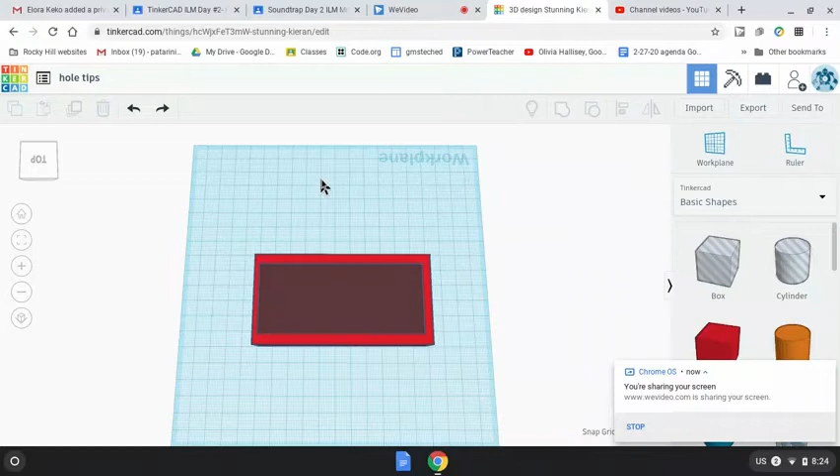A while ago, I helped somebody with getting a hole into their box.

I'm going to rewind a little bit because somebody was asking questions about the aligning tool. Let me zoom in a little bit. I guess I'm moving the box and not the hole here.

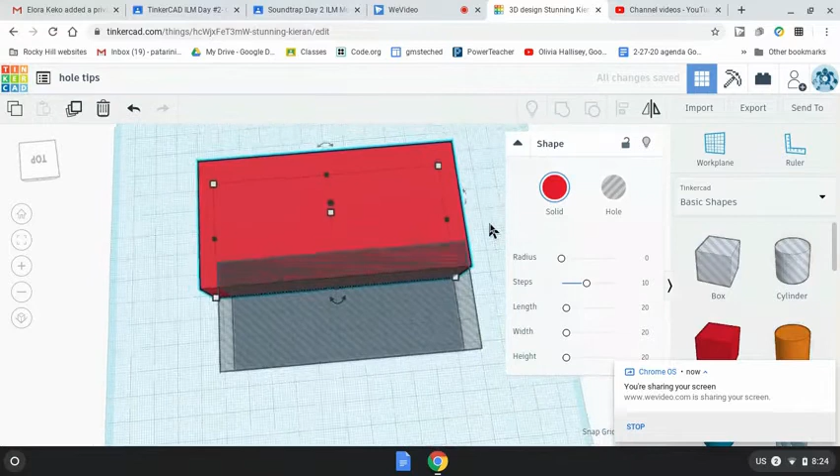But if I get over this guy and back out a little bit, I want both of these objects to be lined up. I want this hole to be perfectly centered inside this box. So here's what I'm going to do.

I'm going to make a square around both of them. I did that by clicking with my cursor here, holding my left mouse button down, and dragging it all the way. You can see there's these little squares, what we call handles, around both pieces. Both pieces have to be selected if you're going to align something, which means line it up and make it even on all sides.

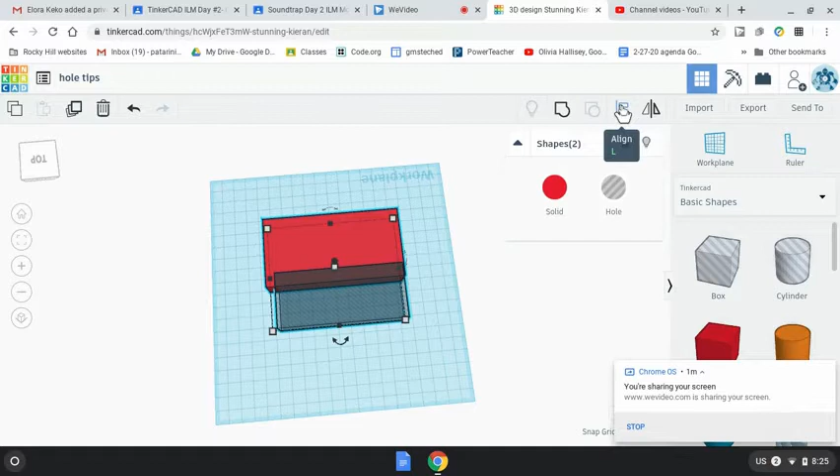You have to have two things selected. So this is our align tool. If you hover over it, it says so. And it gives you these little things, almost look like a lollipop, sticking out of the end of it here.

That one centered it here. This one centered it here. And if you look, that's pretty even around all the edges. Okay.

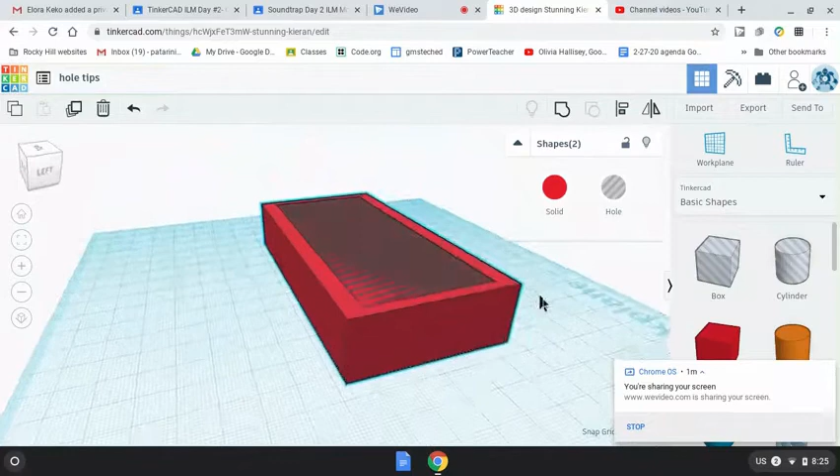So when you've got that align tool, clicking on these little lollipops, different ones will get you different actions, but clicking the one in the middle on this side and the one in the middle on this side should give you exactly what you need. Okay, so hopefully that's not too confusing. Aligning is a really useful tool.

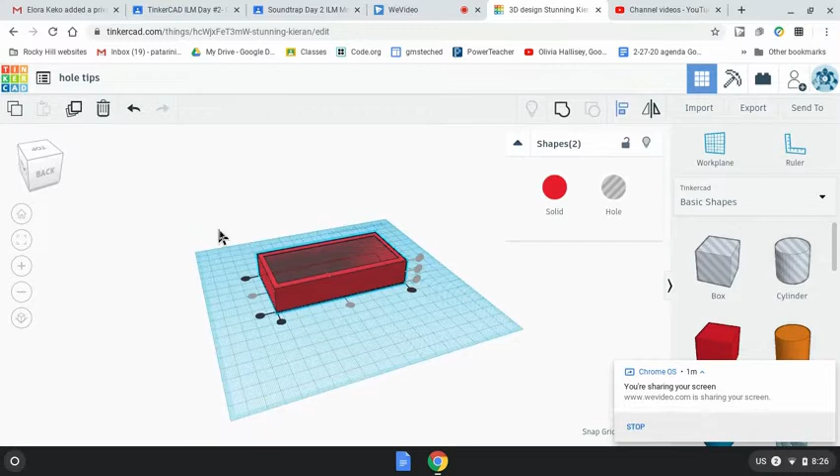And then, of course, I would click and drag a box around both of these things. Oh, come on now. And then click on the group tool, which basically turns it into one object.

Oops, looks like my hole was too deep. I might have to go back and undo that and drag my hole up. Here, hang on, let me back up a space.

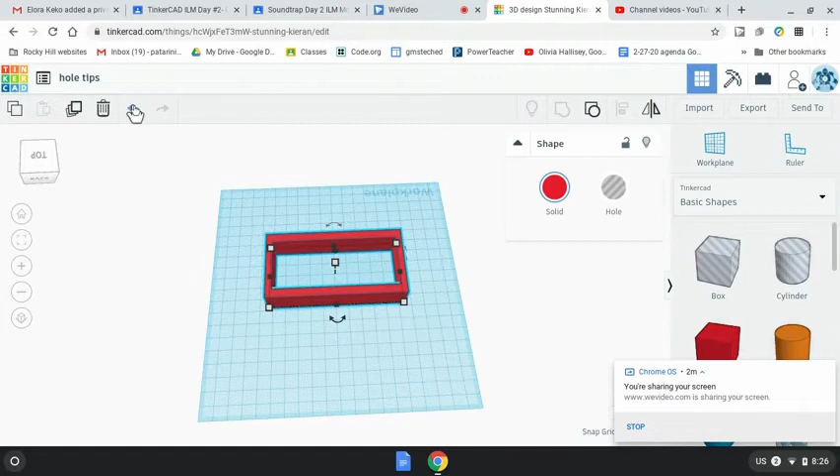If I can click on this guy here. Come on now, it can be a little challenging. What I'm trying to do is grab that little cone. It almost looks like a little witch's hat to me.

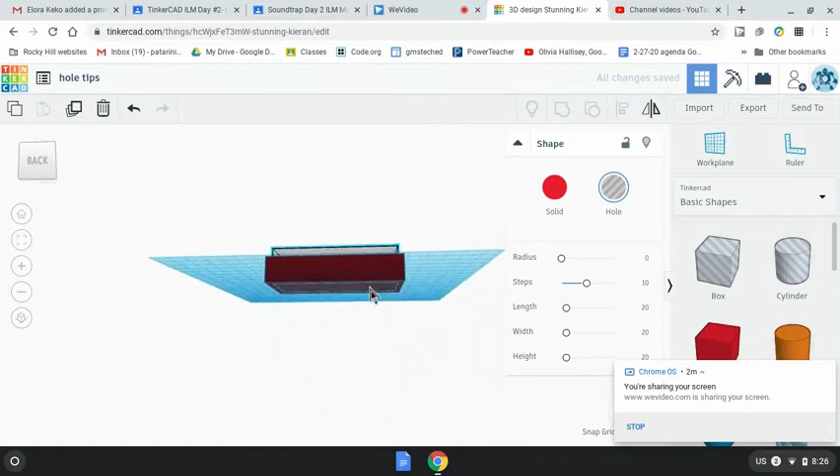And you can see I dragged that thing up a little ways, and now it's still aligned. You can see the edges are pretty even all the way around. And if I drag...

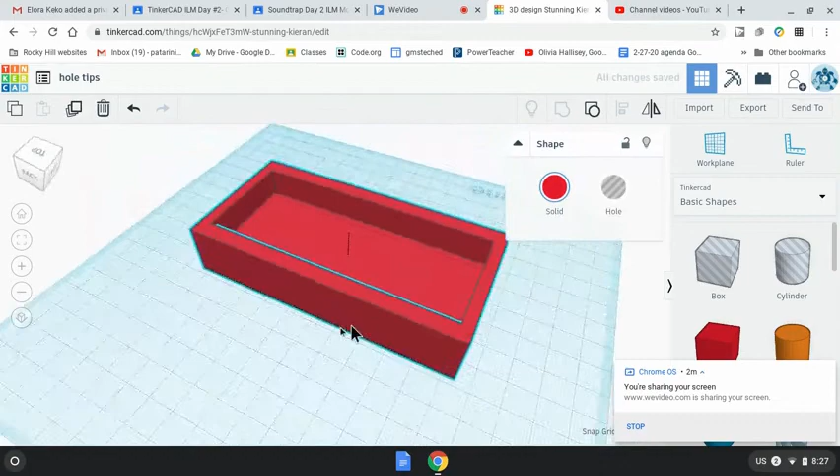Drag a box around both of them, and then click the group tool, now I've got a box that's got a hole in it. Okay, so hopefully that explains your questions away.

And this, I'm going to change to 'hole tips,' and I'll save that. All right, hopefully this helps.